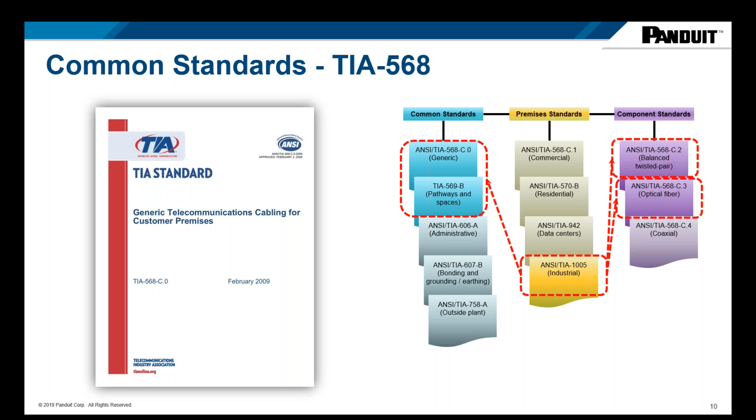TIA 1005 is a premise standard that builds on 568, but adds consideration for industrial premises. It uses the same type of architecture, looking at the distribution layer and access layer of the network, and all of the foundation standards of 568 apply. However, there are additional specifications around, for example, harsh connectivity, allowing 4-pin or 8-pin circular connectors for 100 megabit or gigabit performance in a water washdown type application.

What's a little more common are the guidelines for evaluating environments. You're probably familiar with the acronym MICE, M-I-C-E, talking about the mechanical environment for shock, vibration, or liability to be pinched.

Ingress with water and dust, as well as climatic and chemical environments, looking at things like caustic environments, but also liability to condensation and what that condensation could result in the environment. And electromagnetic effects, since especially in the industrial environment, there's a lot higher risk of EMI interference for the low voltage cabling.

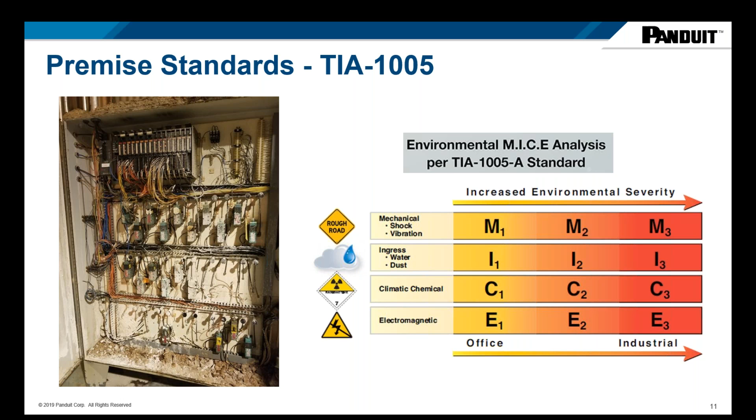So those are two specific sets of standards, but really there are a lot more that I'm not diving deep into, looking at grounding and bonding, TIA 607 and some others, looking at the power applications and pathways and the actual consolidation cabinets for the network equipment, and data cabling and the administration of the environment. So there are a lot of standards to pull together.

We also need to look at code, and there are a number of best practices that are pulled together. And what we do is invest in BICSI corporate membership and utilize the Registered Communications Distribution Designer certification to help pull all these together. This adds in specific training around newer standards and applications, and includes continuous classroom and field learning.

So this is how we can maintain visibility to all of the standards and pull them together for the benefit of our customers. And this is really how we're basing our Panduit certified services and validation of the work that our partners are doing.

So when we look at the standards, we can see situations like this, which are common issues in network implementation, and begin to classify and identify these risks and propose solutions when we see the specific situations that are included.

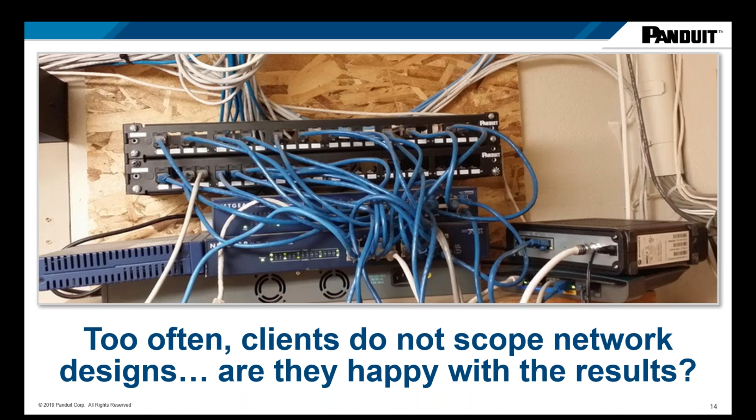So this is what we want to help the industry, is provide the tools required so that you can communicate to the client, so the clients can communicate to their approvers a better way to implement the physical infrastructure.

Now, as we discuss this, we realize that the clients need more than physical infrastructure. Clearly, they're looking for an effective rollout of, for example, the manufacturing execution systems that are running the plant, from a legacy system on coaxial cable to a modern Ethernet-based system.

They're looking for perhaps IT or OT convergence or improving the network security in the plant or across the enterprise. They're looking for adding capabilities for remote monitoring and remote management across dozens of plants that point back to their headquarters location where they're maintaining.

When they're implementing a network, they're not looking only at the network. They're looking at a broader scope of implementation, and the network is something that's required in order to get that done.

What many customers have begun to see is that a network executed well will pay dividends on these goals with improved security, improved uptime, and improved maintainability and documentation—not only for initial debug and implementation, but also maintainability and growth of the system over time. They're going to get a lot more life out of the system that's deployed.

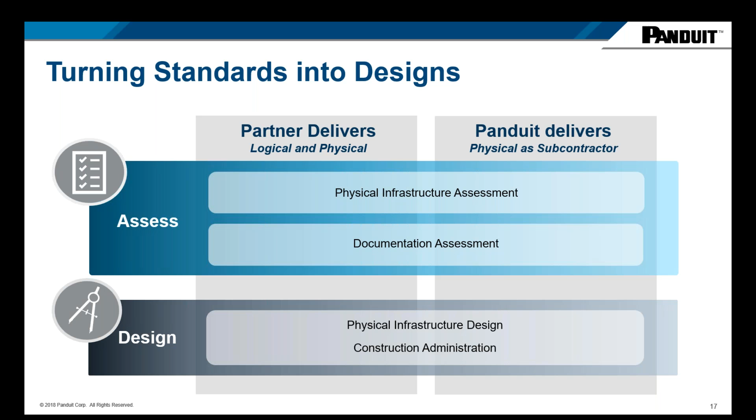So now we'll go into the assessments—the two assessments that are available to drive awareness of the client's infrastructure and really move them forward to a better path in their infrastructure.

Before we do that, it's important to understand how the client is positioned today. Are they implementing a new manufacturing line in an existing facility or an additional building that's already budgeted? Are they implementing a new technology, such as a software upgrade, control system upgrade, or quality system improvement? Do they have no plans but realize there's risk, or are they unhappy with the current state of their infrastructure?

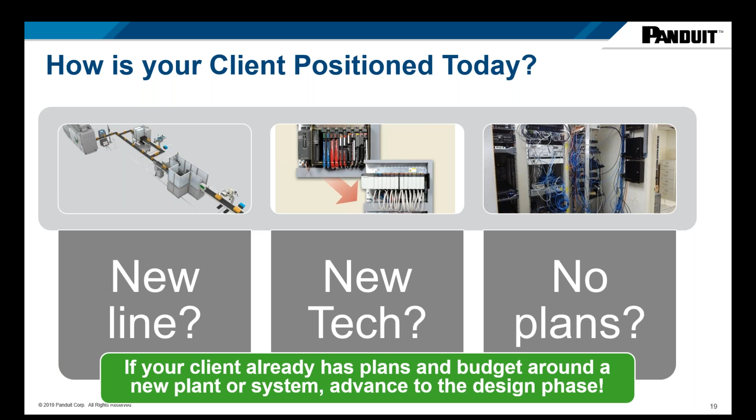It's important to realize that if they already have plans and a budget around moving forward with something, there's no need to start with an assessment, because the design process will identify what needs to happen for that client. So you can advance directly to the design phase if the customer already has plans and a budget around implementing an improvement or an improved system.

However, if they don't have that budget, or if they're aware of potential risks but don't know the details and need information around what those risks are, if they have a desire to fix but need information around their system, the physical infrastructure assessment can help.

In this assessment, our partners would go on site and perform an analysis of the deployed infrastructure, taking plenty of pictures of, for example, the grounding situations at the site, pathways and how those pathways are used in the transition from pathways to consolidation points, the cabinets used, ingress and other MICE-related issues around the cabinets, data cabling—whether it's shielded or not and its proper application—proper termination, and looking at the labeling and how each of the connections are identified from one connection to another.

So again, this can occur in parallel to a logical network evaluation.

What the client would receive from an assessment like this is a report that shows representative pictures for each of the areas that are assessed. We look at these 7 areas that also follow the BICSI manual and the physical infrastructure areas for concern.

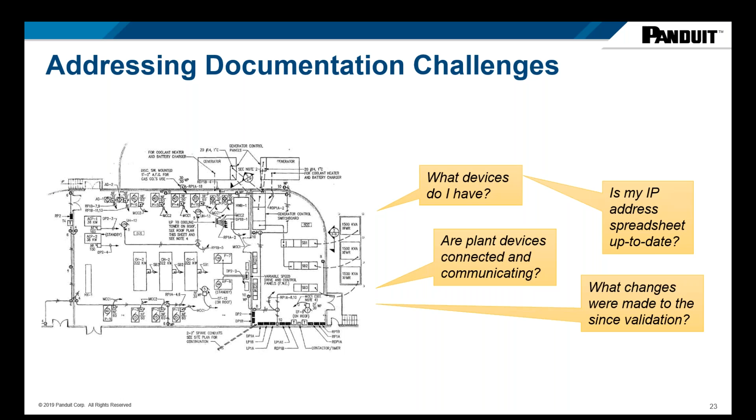So the documentation capability is a separate assessment capability using Panduit's IntraVUE software, which allows a client to receive a picture of their network and all the devices connected on it, where our partner performs that configuration, or works with Panduit to configure the software to scan the client's network. This discovers all of the IP assets in the plant that are connected and provides the client that list of IP assets, as well as identification of where some of those devices connected to the Ethernet network may be showing intermittent failures or communication errors on the network.

This service can be delivered in a couple of simple steps. We can provide a one-time use assessment license via our partner portal and some of the online request tools. You can also purchase an appliance fully configured and ready to deploy on the plant, that can be moved from one site to another as a perpetual use tool. You can have one or multiple of these, but it's a perpetual use tool that you as our partner can then install and configure on site.

Once it's configured, the software will work automatically, and you can provide an export of the documentation directly from the software.

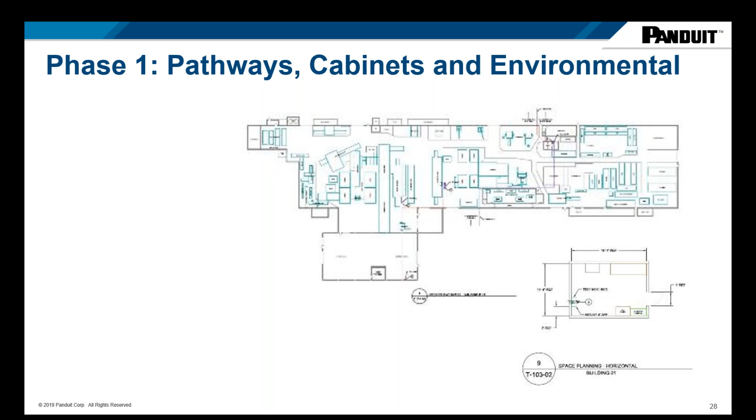So phase one for delivering this type of service is we're going to start with the MICE risks—risks in the environment, inherent in the environment, that might need to be avoided or considered specifically. There might be an area with chemical washdown, high EMI, or high temperature. We want to look at those first, so that as we define the pathways and network consolidation points, we can work around those areas or be mindful of them.

So we'll start with looking at the cable routing or identifying the network consolidation points and where they're going. You might have a computer room with space available, or maybe there is no space available and you need to put a NEMA 12 enclosure on the plant floor. Once that's defined, we can define the cable routing between those consolidation points. There might be existing pathways that need to be evaluated for suitability, or you might be designing entirely new cable racks for the pathways across the environment.

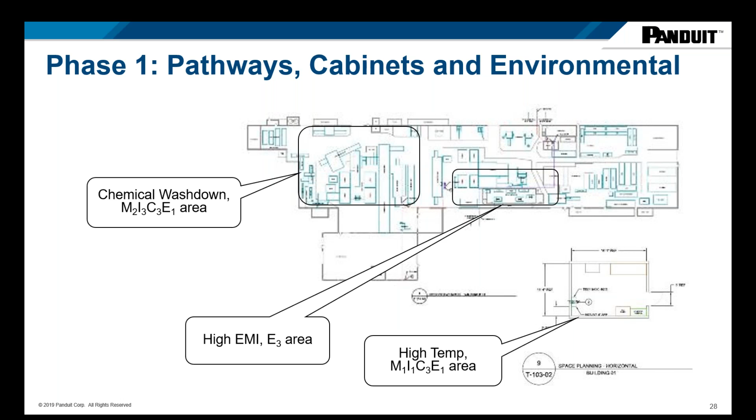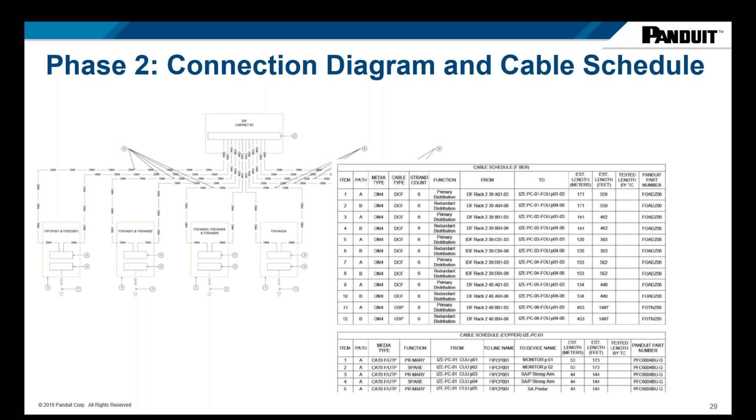So we go through this. It can be done in multiple phases. What we prefer to do is break this up, for the client's benefit, into at least two phases. This is both for the client's benefit as well as for your benefit.

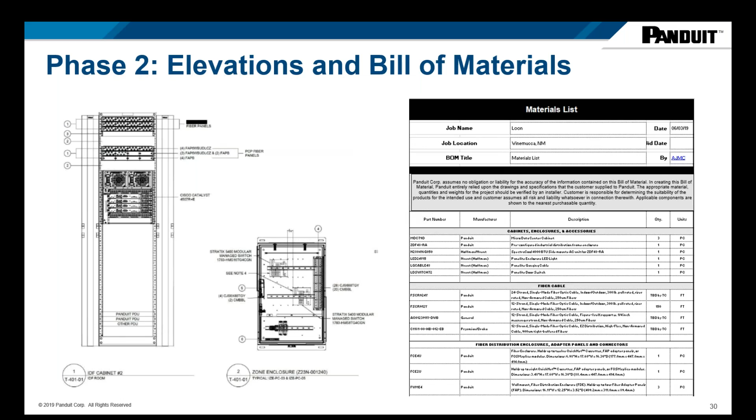Because when you are getting into the elevation, the connectivity map, etc., before the pathways and enclosures are defined, often there's rework required on those elevations and connectivity, and we want to minimize the rework to minimize cost to the client and minimize frustration for you.

So what we recommend is first identifying those enclosures, the network consolidation points, as well as the pathways, get that approved specifically, and then move on to elevations and connectivity.

Of course, you want to make room in each of these phases for client approval and updates, and it's helpful to view it in a way that helps the client understand that the sooner they can get an approval on the first phase, the sooner we can move to the next phase.

And this is definitely a delivery schedule that's compressible based on both approval and updates, as well as the more information that the client provides to you up front, the fewer unknowns and lower risk overall.

So this is just an example of how the physical infrastructure element of the project can be deployed. It's also important to understand this is happening in parallel with a lot of other things. So the more information on the logical network design that's available before the intent is finalized, or before the pathways and enclosures are defined, also minimizes rework across the system.

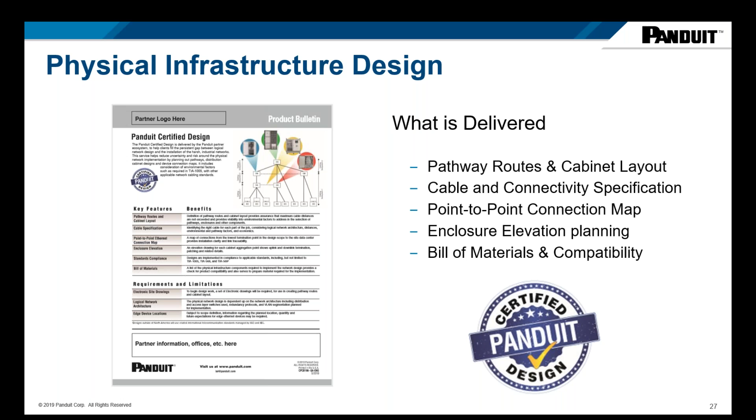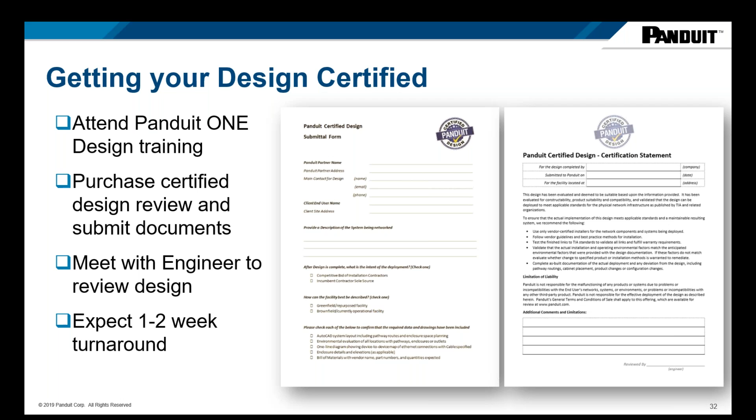And then the second question around the assessments: we definitely have a form that walks through the areas and examples, things to look for with each of the 7 areas to assess. There's a part of the template that gives you an opportunity to fill out details, and an additional section that goes into detail on things to look for, almost in a checklist guideline, to make sure that if you're less than confident, you can cover all the areas.